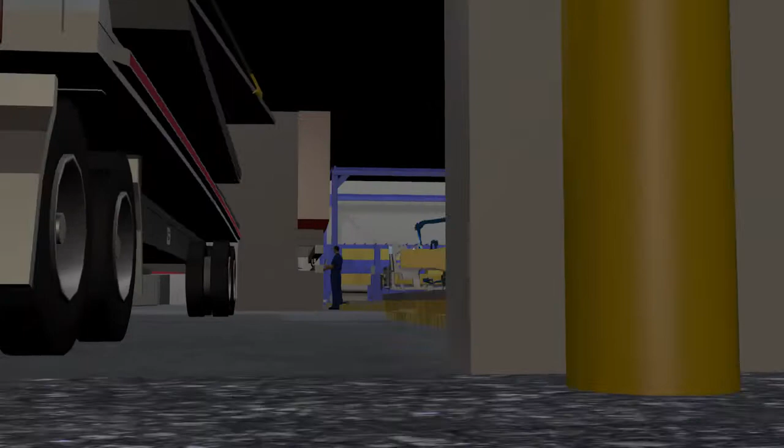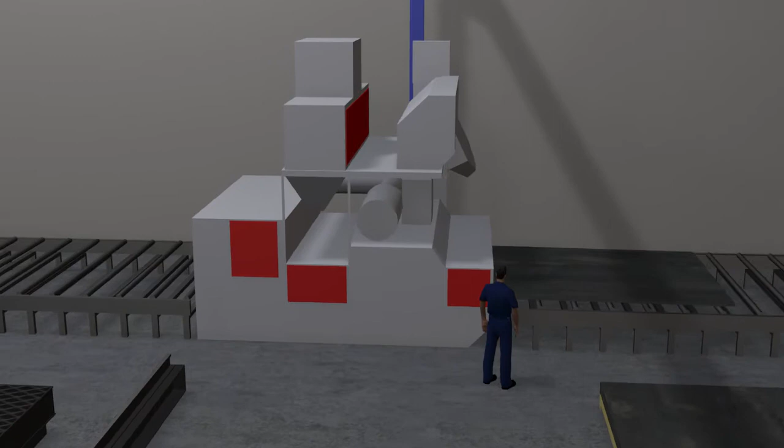The process begins with incoming receiving of castings and steel plates. The D11 frame requires 8 different material sizes ranging from 20 to 50 millimeter in thickness. This storage area represents truckload shipments with enough plate for 12 finished frames or 3 weeks worth of working stock. All material will be processed through a dual-sided plate blaster to remove mill scale and iron oxides to improve weld quality and drive process efficiency.

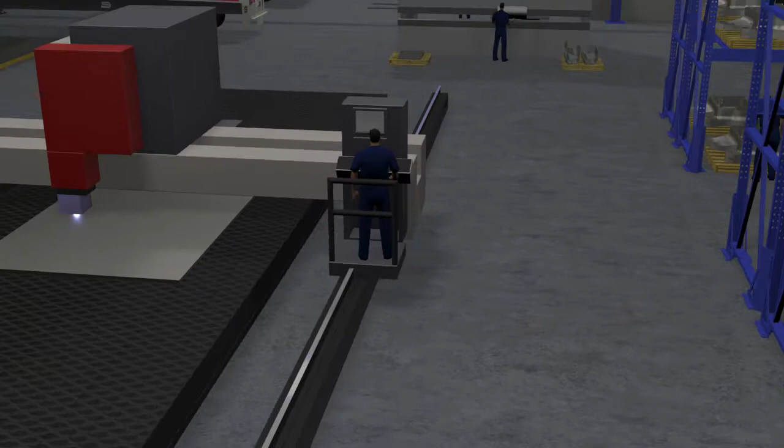Using an 800 amp plasma cutting system, more than a dozen details will be produced for the D11. The D9 and D10 could be added without the addition of any machines. Currently, Lapeer has 3 cutting systems to provide backup to this operation.

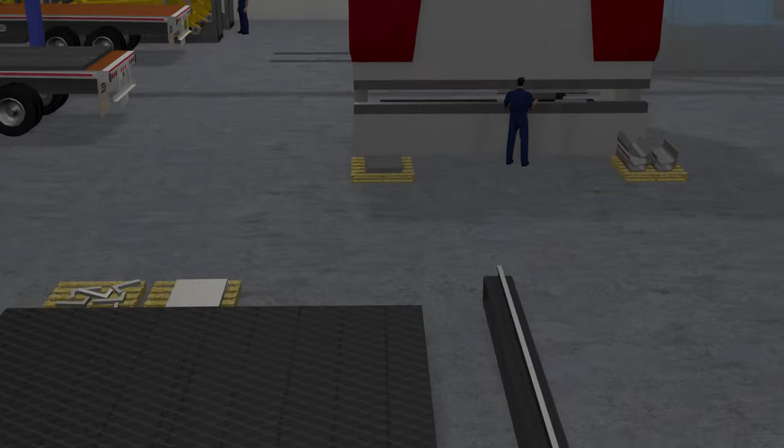Multiple pieces of the case, frame, and support will be formed by the CNC-controlled 1,200-ton 20-foot press brake. An automated back gauge will be used to form each detail. Lapeer has 2 press brakes that can serve as backups to this machine. Castings will be centrally stored in a protected area and managed using our integrated inventory control system.

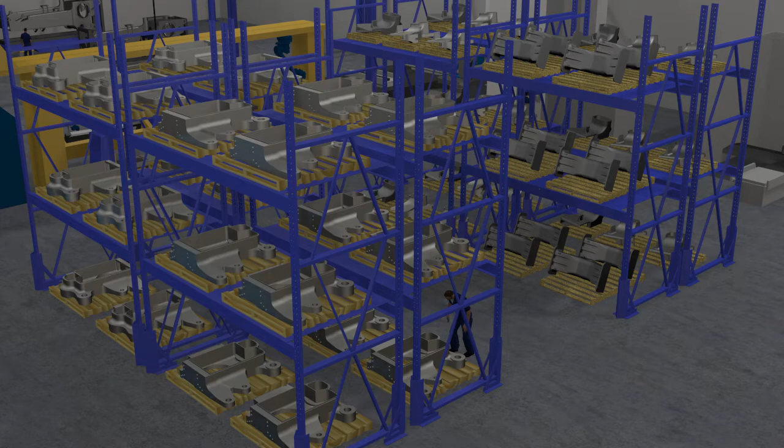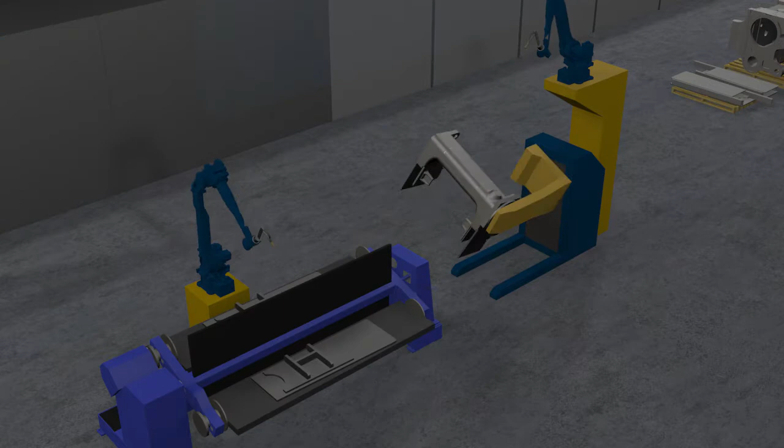From here, robotic welding of subassemblies begins. There are 4 subassemblies and 1 complete structure-level weldment. The plant utilizes 7 MH50 Motoman standard and long-arm robots with positioners. The first of these 2 welding stations represents a Ferris wheel fixture, fabricating the inner portion of the box frame, known as the pork chop. The second shows the box front end assembly, consisting of 2 castings and formed and flat plate details.

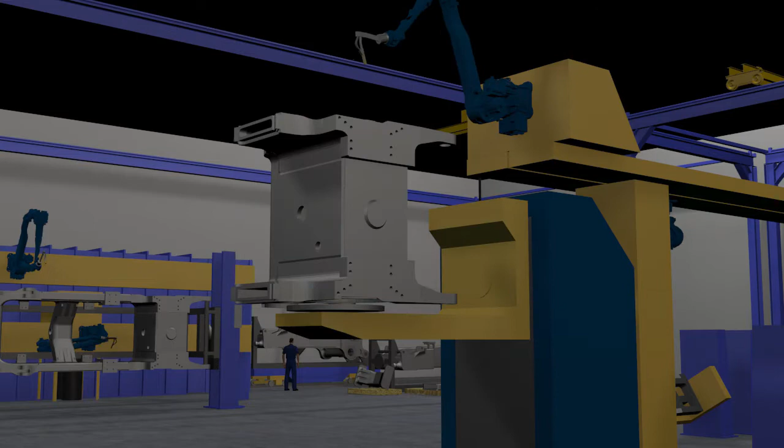Here in the second welding station, the largest subassembly, the case, is also fabricated on a 7-axis robot and positioner combination, which allows for the ideal weld position, or 1F, and reduces multiple process steps to a single weld operation. The 4th subassembly represents the final weld out of the box frame using submerged arc welding robots. Submerged arc welding allows for improved weld speed and quality over traditional gas metal arc welding processes.

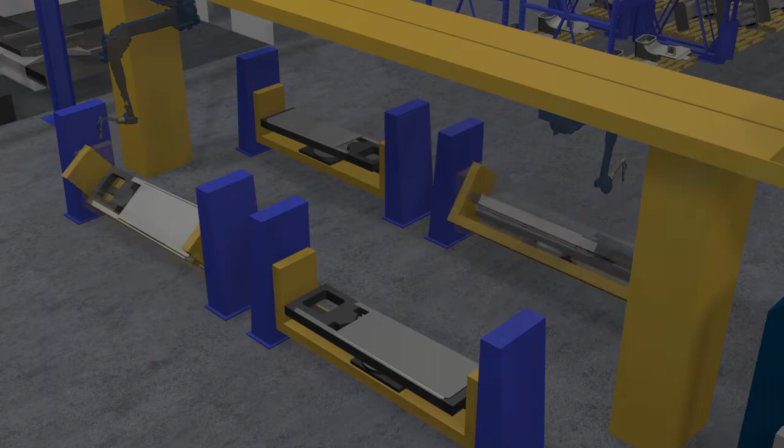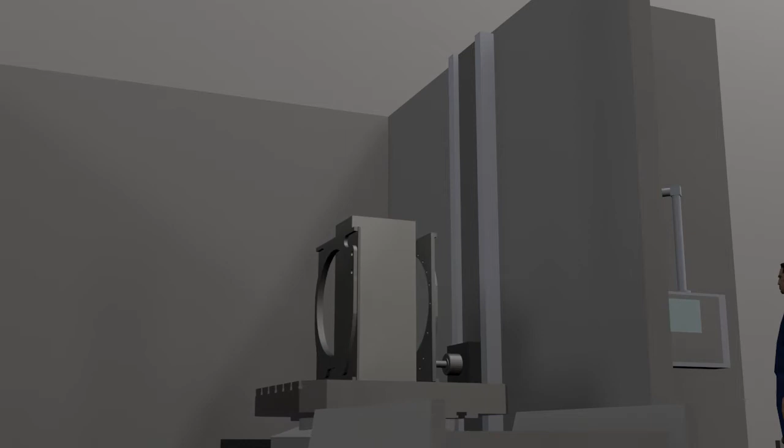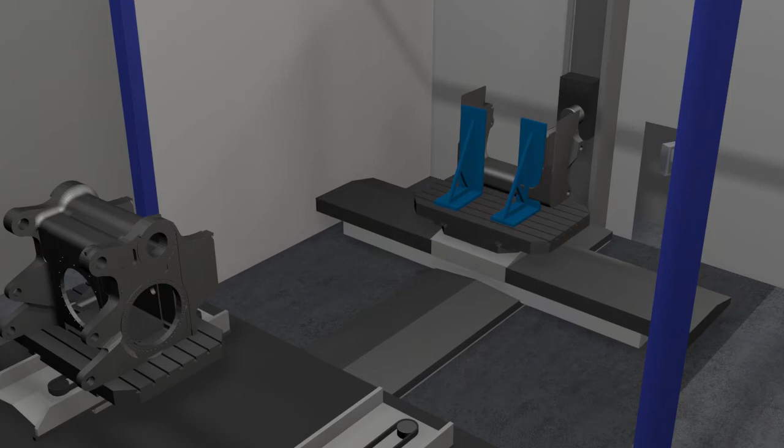We are now moving to CNC machining. The first CNC machine represents a 120 horsepower mill, removing approximately 1 inch of material from the case backplate. This setup provides 4-axis capability with a 3-axis machine and a tombstone fixture that rotates the parts on a 4th axis. The second and largest of the 2 machine centers, a 150 horsepower mill equipped with a dual pallet changing system, shows the frame front support and case receiving post-weldment machining details prior to full frame fabrication.

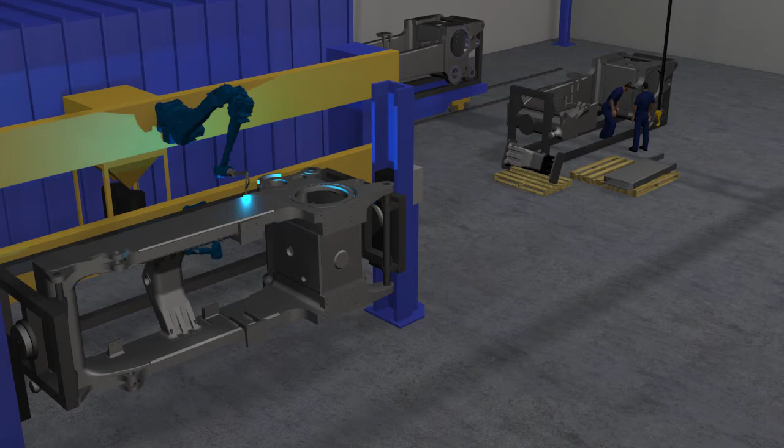The final welding operation completes the structure. The 5 subassemblies are now joined using a modular locating fixture. Once mounted into the welding station, the fixture allows the frame to rotate axially using an automated rotisserie-style headstock-tailstock arrangement. The modular fixtures will be preloaded offline to maintain a high operating efficiency.

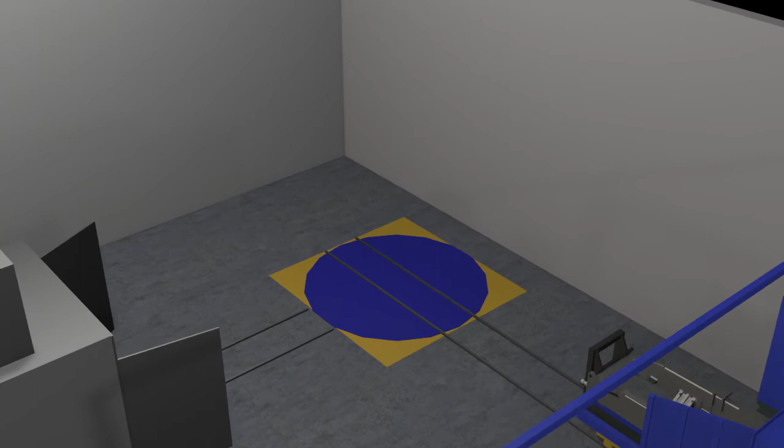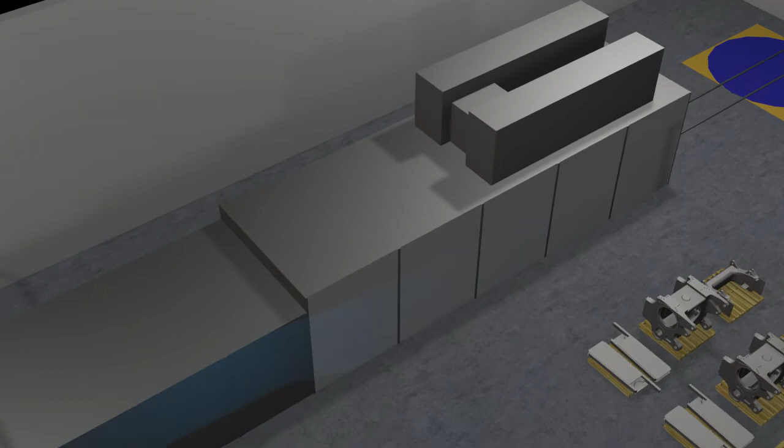Both the frame and fixture are now moved as one and loaded onto a trolley into the blast, paint, and dryer oven line. The pre-masked frame will be prepared for paint through an automated steel blast booth and is washed prior to turning on a railcar carousel. The frame is then primed, painted, and baked. Part marking and serialization, along with final inspection, occur in the outbound staging area. The frame is now ready for shipment.

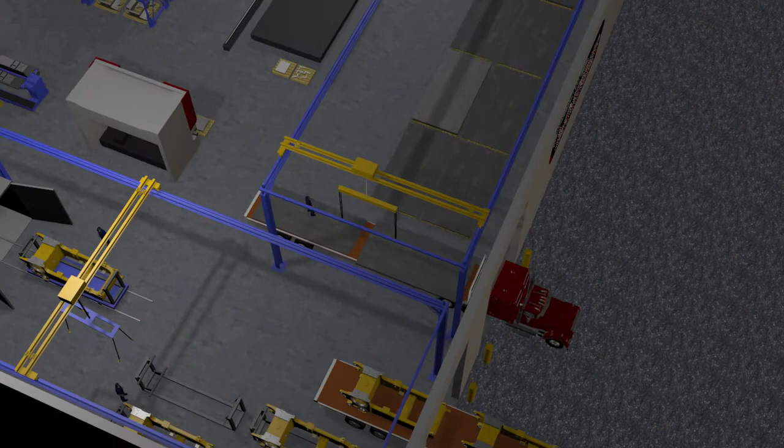The configurable plant design pictured here shows approximately 40,000 square feet needed for the D11 frame. With minimal modifications, the facility can accommodate the addition of both the D9 and D10 frame variants. Many of the current assets shown in this representation are already in place. Lapeer Industries and the Marvin Group are proud suppliers to Caterpillar and look forward to the continued partnership and collaboration on this and other critical programs.